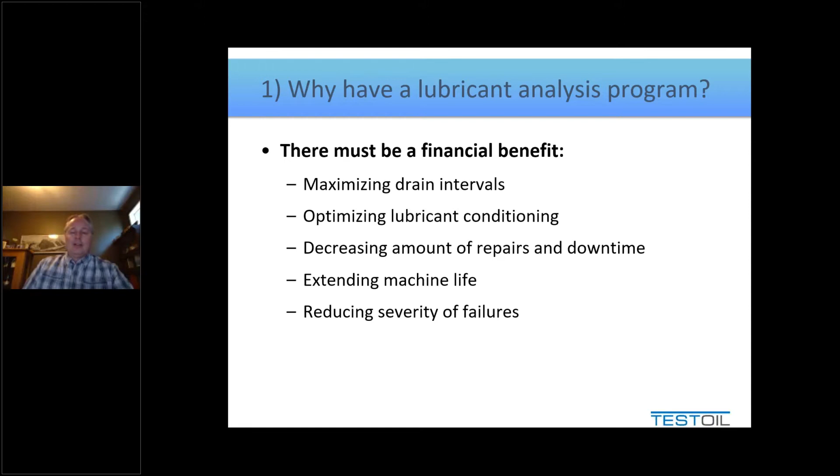So you're going to aim to reduce the severity of a failure. You may not prevent the failure, because if something's going to fail, it will probably fail anyway. But if you can catch it sooner and take corrective action earlier, the severity of that failure should be significantly reduced. The last one, though, is that, and you'll see where this is going...

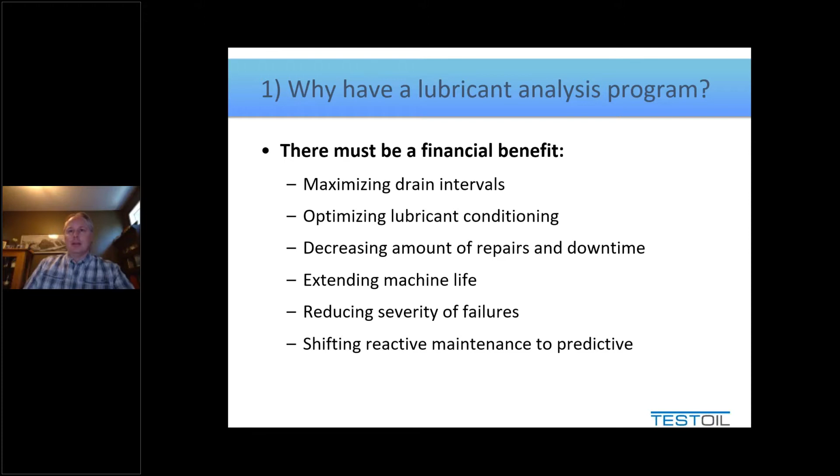Evan, you seem to be cutting in and out a little. I don't know if you want to try turning off your video too, so you're not using as much bandwidth for that. All right, let's try that then. All right, here we go. We'll see if that improves things.

But anyways, I was just finishing up with, we're trying to not use alarms as a reason to do things, right? We don't want to wait for the failure to occur or for it to at least enter into failure mode. We want to be as predictive as possible and do things on as much of a schedule with as much pre-planning as possible. It helps reduce costs, it helps reduce downtime, and of course, therefore increases uptime.

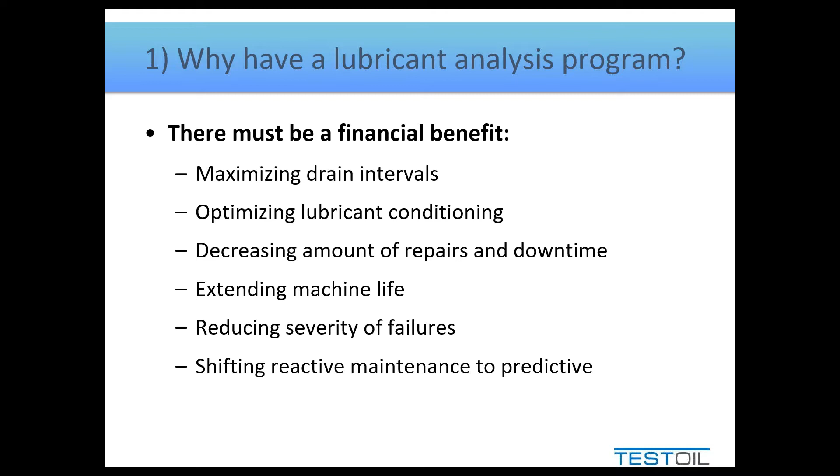So with that, you have to pick at least one of these reasons to have an oil analysis program. They help form the goal for the program. Now, when we talk about this, like I said, there has to be a benefit. So in picking one of these, we need, generally speaking, an economic return on investment, that we will have savings with all these costs.

And if you look at various examples that are out there, and I'll go through a few at the end, they range anywhere from 2.5 times return on investment to a 20 times return on investment. Point simply being, it should pay for itself.

And the idea why is that if you look at different statistics, they all hover around the majority, whether you want to believe 80% or 90%, but the majority of failures have something to do with the lubricant or its condition from degradation. Lubricant analysis picks up on contamination and degradation quite easily, so this helps us identify some of the more common problems that could lead to an equipment failure.

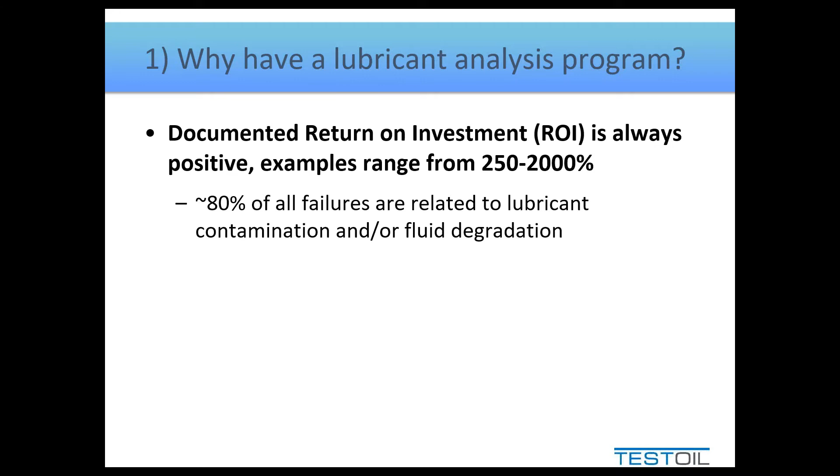Another reason to have a lubricant analysis program is it will support root cause analysis investigations, or if you prefer the acronym, failure modes and effects analysis. And it also works with synergy, meaning sort of a double positive effect here with the other condition monitoring technologies, especially like vibration.

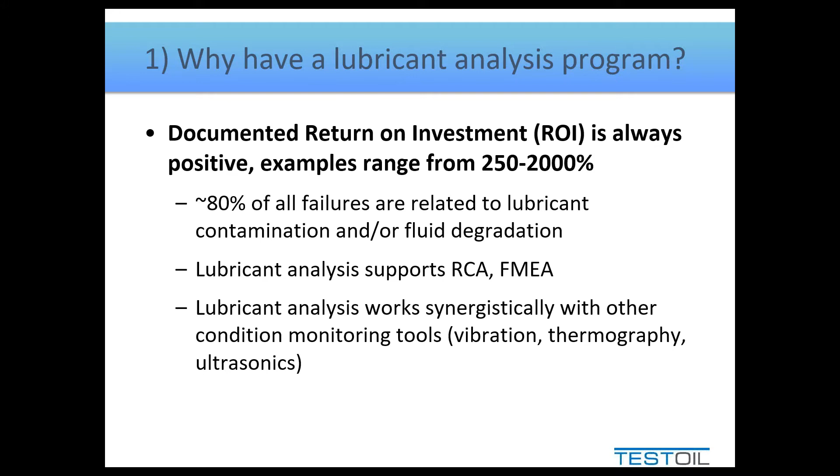As I said, we have to pick a goal, to have a reason for doing this, and we need to make sure it's going to be economically feasible. So the three most common that get chosen are that first one I mentioned: we want to reduce our oil consumption.

So that will help us understand what we're testing, which properties of the lubricant. A common one is extending equipment life, which in this case we'd focus more on, say, wear metals and contaminants. And of course, another good one is just to increase the overall reliability or uptime. And we might do a bit of a balance between those first two.

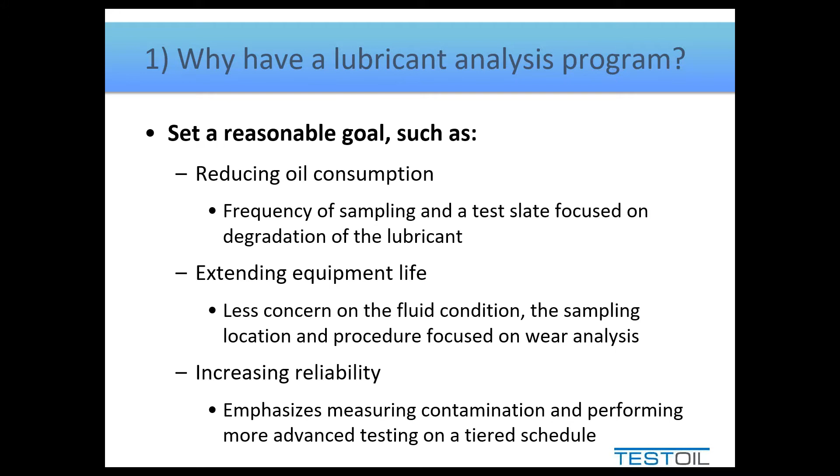So knowing why we have a program, knowing what the goal is going forward, we can now form our team of who's going to help us get there. So generally speaking, when you look at personnel required to be part of this team, you need to make sure they have the right skill set. I mean, that's true of any team.

So it starts with something as simple as pulling samples. If you can't get somebody who will pull samples in a consistent manner from a consistent location, you're going to get very noisy data coming in, and the program will already begin to fail before you've even really gotten started. So it seems like a pretty simple thing, but that's one of the skills you need.

And that may be fair if they've got the time, but if they're already dealing with a full slate and you have them running around doing these extra tasks, shortcuts will take place, or some tasks will get missed. So we want to make sure they have time to do that side of the job correctly.

The example I give here is the time to read the reports. It's an all too common aspect that many people can find the resources to pull samples, send them to the lab, pay for the results, but by the time the reports come back, nothing is being done. We don't have people reading the reports and writing up work orders based on them. They more or less glance at them quickly and say, yes, it looks like it will still run, we'll just leave it. They're not trying to predict anything, they're just looking for the absolute catastrophic bad examples to say, okay, maybe I should do something now. And at that point, it can be too late.

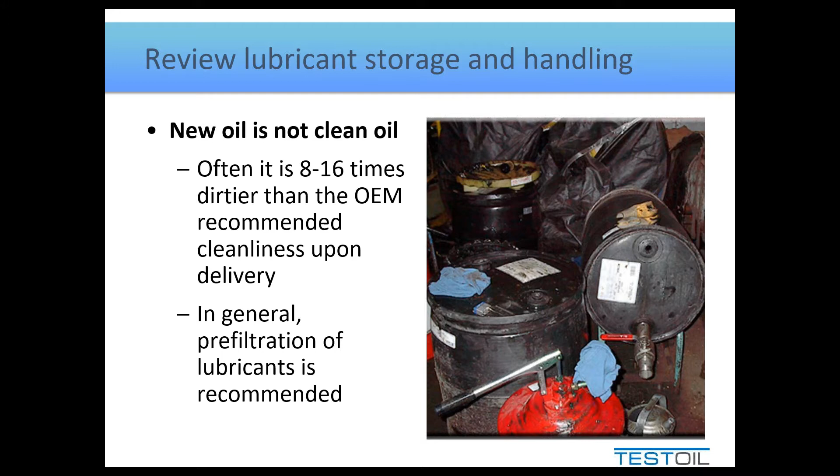So when you do an audit, and again, this is done all internally, you don't necessarily have to contract this out, you can do this yourself. You start by reviewing your storage and handling practices. Look for some of those easy changes you can make to improve the quality of your lubricants going into the machines, improve the accuracy of which lubricants go into which machine, things like this. So you start with receipt from delivery: where do you put your new oils, what kind of housekeeping do you have, what kind of filtration do you have. See if there's improvements that can be made there, and look for ways to prevent contamination.

Proper breathers is a very common thing that can be upgraded on both the new lubricant storage and even on the machines. Make sure you consider if you need desiccant though. That's not required by all people in all areas. It handles humidity, so unless you have a humidity issue, you don't necessarily need to go all the way to a desiccant breather. But if you do require it, make sure you size it appropriately so that it has the ability to strip enough moisture to make the difference.

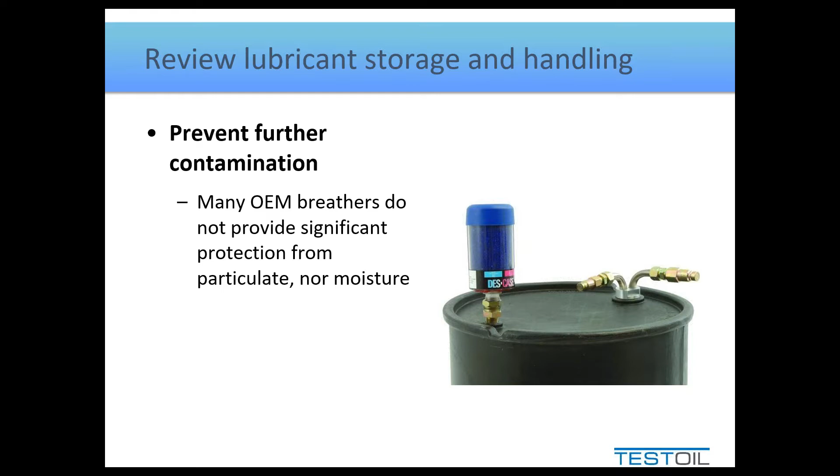But once you do that kind of audit on the lubricant side, then you go up to the machine side, and now you need to select which machines you want to sample. There's essentially 6 factors that I consider to make it worthwhile sampling. So one factor is...

Criticality. If the machinery is critical to your overall operations, it is worth sampling. Generally, when we say something is critical, it means that it doesn't have a redundant capability - there's not a second one that takes over if the first one fails. Or we mean that it has a cascading effect on other lubricated components, so if it shuts, other things shut, other things trip, that kind of thing.

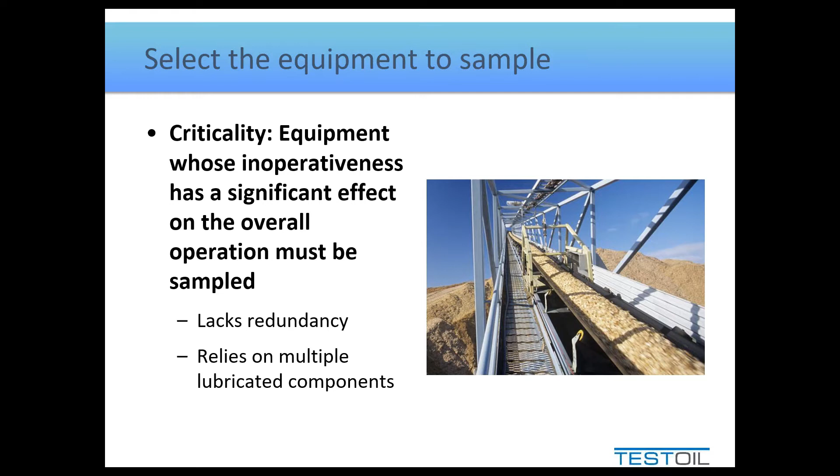Second aspect is if it's designed for safety. Is it required to provide some sort of safety function - a rollback device on a conveyor belt, a braking system on an elevator, and of course fire water systems that are quite common in many, many plant facilities. If it's a requirement for safety or any other regulatory concerns, it is worth sampling.

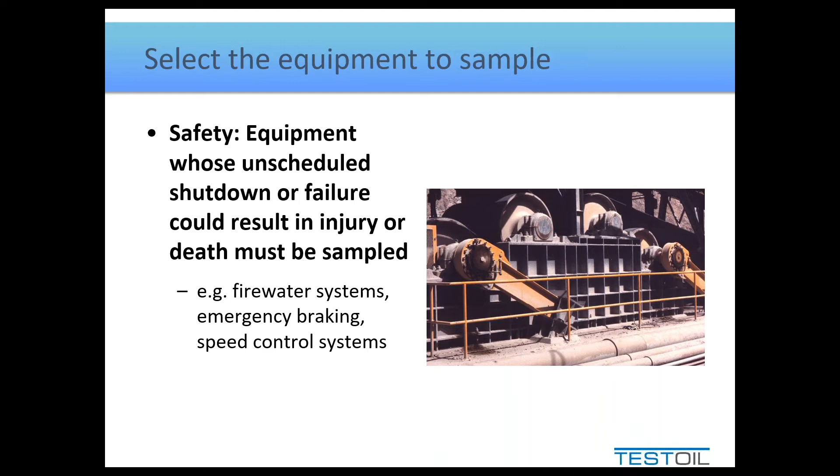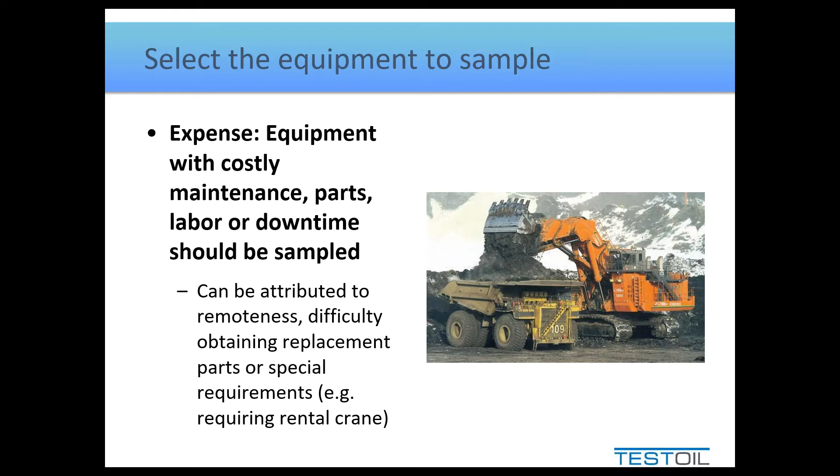Fourth one is reliability. If it does not have a predictable lifespan or failure, if things just happen and you don't seem to have logical explanations for them or any sort of predictable pattern to it, you probably should consider implementing lube oil analysis on it. But if you have machinery that's designed for a service life of 5 years and you easily get more than 5 years out of it, it's one of those things where we'd sort of look at it and say, why would you bother sampling it then? You're getting what you need out of it, so focus your efforts somewhere else.

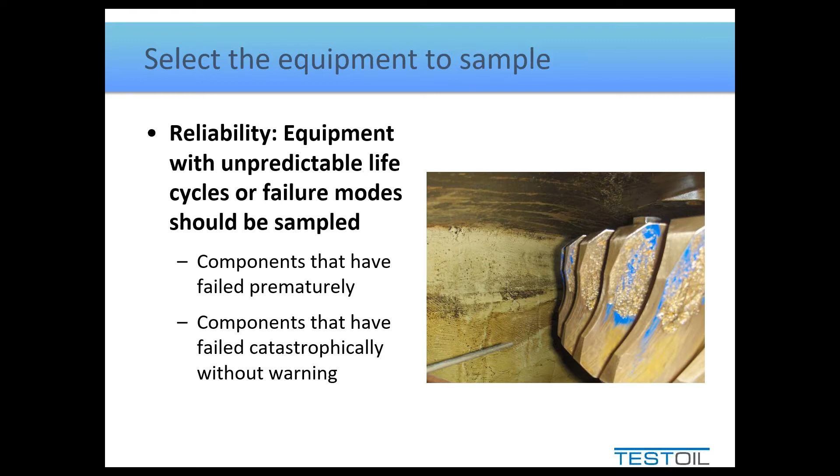The fifth is if it operates in an environment that you would suspect would contribute significant contaminants to the machinery. So it could be humidity, could be particulate, could be heat. Nearby heat even is considered detrimental to the operation of another piece of equipment.

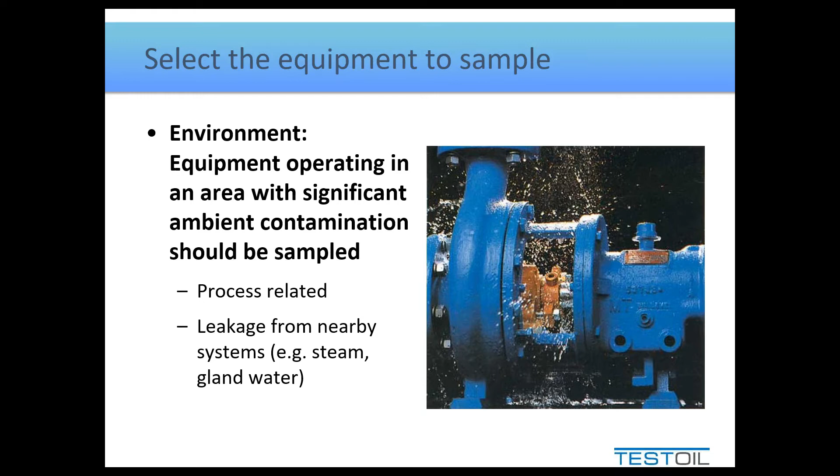And last but not least is looking at the expected efficiency. Does it seem to be consuming a bit more power? Is it not producing the widgets or operating at the speed you think it should? Anything like this that would suggest to you that it could be better would be a reason to sample it. So any of those 6 reasons is a reason to take samples from that piece of machinery.

But if you look around your facility and you go through this checklist of 6 things and cannot apply it at all to a particular piece of equipment, ask yourself, why are we even going to bother sampling it then? It maybe is not required. And again, we should probably focus our efforts on the ones that matter the most.

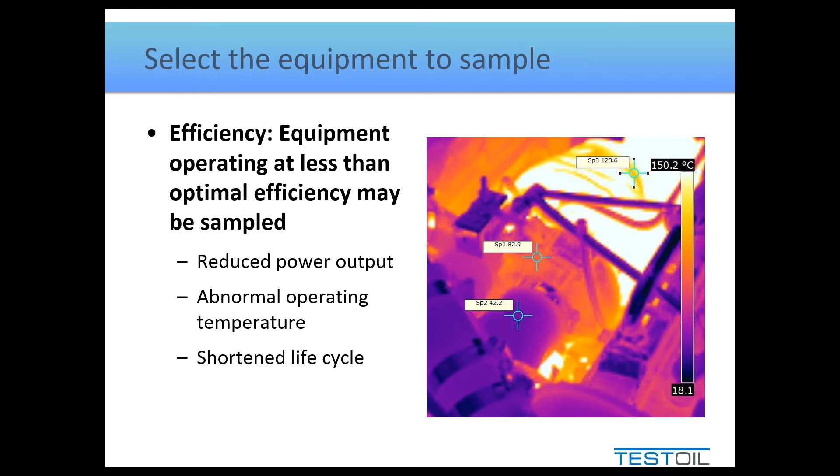Now, once we decide that it is worth sampling, we have to decide where to sample it. So we always want to make sure that the sample point gives us a good idea of what's going on inside. We typically look for live zones, not dead legs - we want good circulating hot oil that represents exactly what's going on in the machine. And when we pick it, we want to make sure that it's a choice that will allow us to take the sample consistently - same spot, same procedure every time - so we'll get trendable data.

If you're asking people to just shove a hose in through an opening and you have no idea where that hose is going to go, left, right, to the bottom, that adds noise to the data and can make it a bit more difficult to collect that kind of information.

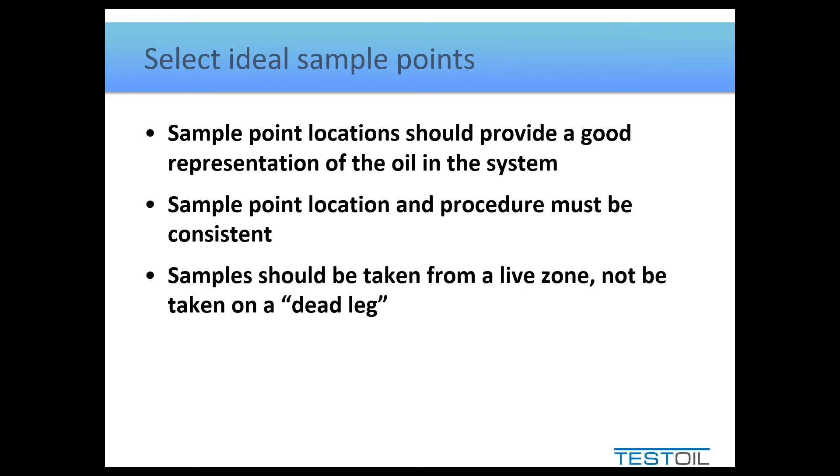Once we decide where we're going to sample, we have to decide what testing we want. That's partly driven by the machine type, since different machines have different wear modes or degradation properties, so you can choose testing to best reflect those. You also want to consider the fluid type, because different synthetics may have different properties you should pay particular attention to. Some oils are a lot more sensitive to water, as an example, so you might want to consistently monitor water content.

Operating conditions are another factor. If you know you've got a known contaminant getting in there, you should probably monitor that. And again, we circle all the way back to the beginning: what was the program goal? Were we trying to extend drain intervals? Then we'll focus on fluid properties. Were we trying to extend rebuild time or equipment life? We'll focus on wear modes. Are we looking at uptime and reliability? Then we might want to focus on both.

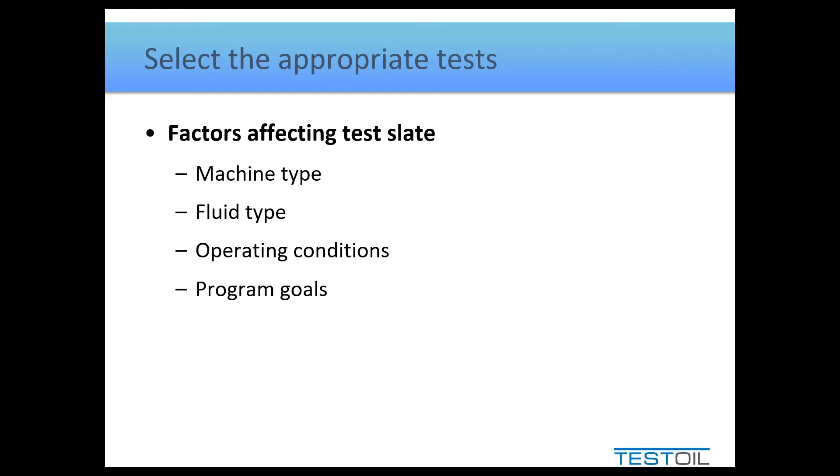Other things to consider are how often we should sample and do those particular tests. The frequency is most affected by some of those same factors. The criticality and the expense will tell us to sample a bit more frequently. If there's a reliability issue or a harsh environment or any operating conditions that are extreme, we'll probably want to sample it a bit more frequently. So lots of factors go into these decisions in terms of pulling a sample, deciding what test to get, and how often you're going to want that piece of data.

Even if you decide to sample something as frequently as monthly or quarterly, it doesn't necessarily mean you always want every single result at every single sample. There are some types of results you only need every second, third, or fourth sample.

But last but not least, as part of all this—pulling samples, picking tests, and deciding how often we want it done—ultimately you need to decide where you're even going to send these samples. Picking a lab is a big consideration as part of your oil analysis program as well, and that falls into a number of factors. The big things I always consider worthwhile investigating are how fast can the lab turn this around?

How good are the analysts doing the interpretation? It's one thing to get accurate numbers out of a lab; it's another thing to get a solid interpretation of those numbers. One factor we can use to verify that the lab should be accurate is any certification.

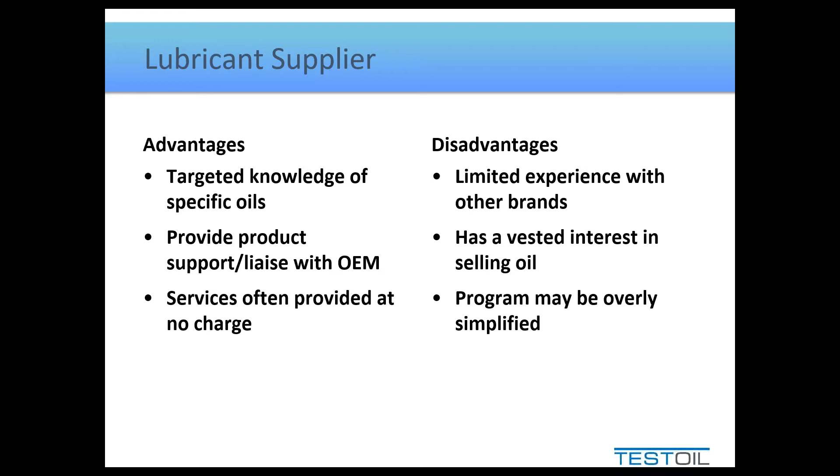So where a lot of people look to then is a third-party commercial lab. The advantages are they've got experience in all OEMs, all lubricant types. They have no vested interest in selling you parts or service. So when they give you an interpretation that says, we think this needs to be replaced, they're not going to make a buck off of it later.

Nice thing too is you can customize what they do. They allow choices to be made. You can supplement your testing, augment your testing, whatever you want. It's open because, well, you're now the customer, you're paying for it.

The disadvantages are that sometimes with these labs we can consider them to be jack of all trades, master of none. Some of them have very vague recommendations because they just don't have the expertise to be terribly specific. And of course, at this point, you're probably paying for it, so there's no way to get this one for free. Costs will run higher depending on the level of service you require. Now, the point of this presentation is to show you it should still pay for itself, but you need to be aware this is one of the more expensive ways of doing things.

The last choice is to do it in-house, do it yourself. The idea behind this is that you're only analyzing your own samples, so you tend to focus your expertise on your own equipment and you get quite good at this. Generally speaking, depending on who you're used to dealing with and how fast you normally get results, doing it in-house is typically faster. And the nice part of it is the end user then is in control of everything.

If they want an additional test, they can get an additional test. They want it tested a certain method, they can do it that way. I also list that as a disadvantage.

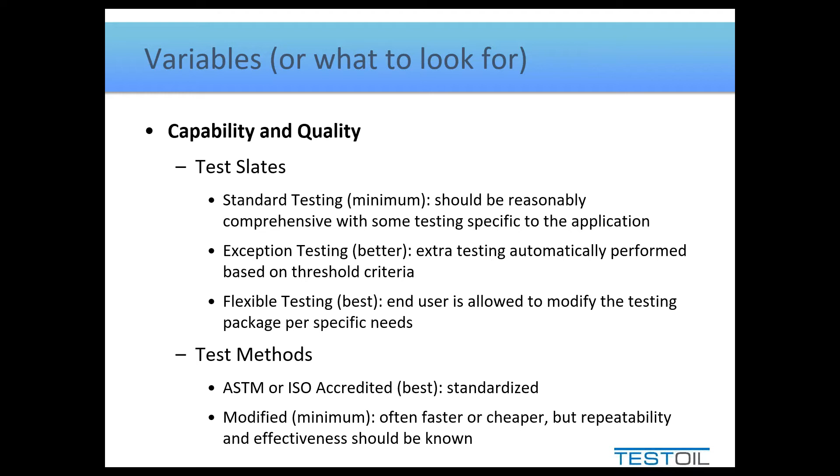Next, start looking into the logistics. The first one on that side of the equation is turnaround time. We know we can ship stuff overnight pretty much anywhere within the country, so there's no reason we can't get the samples to the lab quickly, but we now depend on the lab to get the results back to us quickly. Generally speaking, most labs should be able to turn around results in 24 to 48 hours, and that's from time of shipment to the lab to time of receipt of the results — not just time at the lab, but including shipping times.

We also want to know how do they alert us when there's a problem. Do they just PDF the reports and send you all of them so you have to sift through them? Do they highlight the ones with problems? Do they allow for web-based notifications? Even better, can you log into a website and see the worst ones sorted to the top, and all that kind of stuff?

Next is the quality of interpretation. Do they just use static limits, and if it gets an alarm or doesn't, do they statistically derive their limits to tailor them to your exact make, model, and maybe even oil combination?

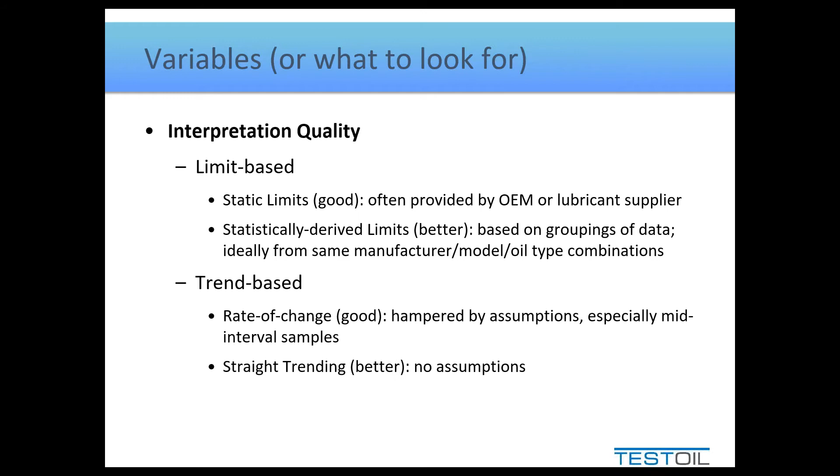Better yet, do they use trends? Deviations from trends can be far more valuable than just static limits. Or can they combine the two and show you the advantages of trending along with limits that are statistically derived? So there's different ways of doing this, and that generally is considered among the best.

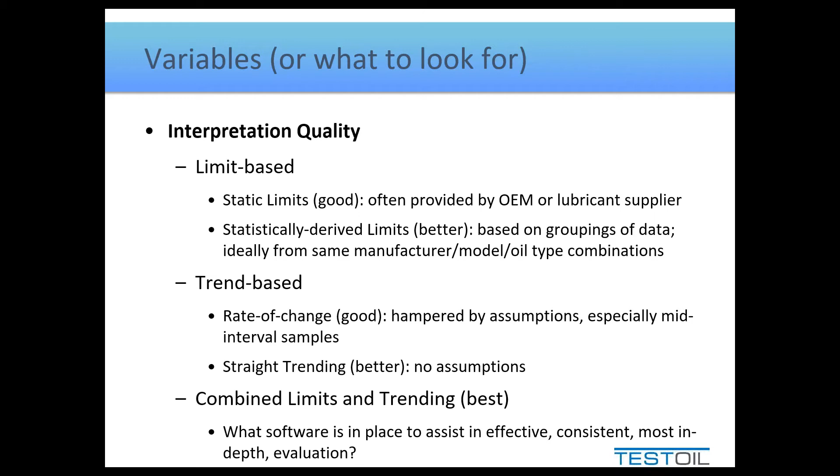Towards the end, once they've looked at your report and set off some alarms, how do they write up the interpretation? Do they give you very generic statements like 'iron is high, look for sources of iron'? That's not helpful. Do they tell you sources of iron may include a few items to look at? Or better yet, do they suggest that iron in conjunction with chromium suggests bearing wear compared to shaft wear, or something along those lines?

So there's lots of different ways they can write up their comments, and that's part of that deliverable, part of that report. You also want it to be very readable.

Is it just a bunch of numerical results you don't know how to interpret? Do they put some graphs in it to give you ideas of trends? Or do they even provide a grading system, showing limits maybe on those graphs, so you can see how close or far away you are from what's considered abnormal?

And kind of the last thing to look for: when you look at these reports, can you easily tell what machine it's for? That way you're focusing on what you know about this machine. Is it easy to find where the most current result is on that report? Is it to the left, is it at the top, is it highlighted in a different color? Do they provide baseline information so you have a comparison for that most current result?

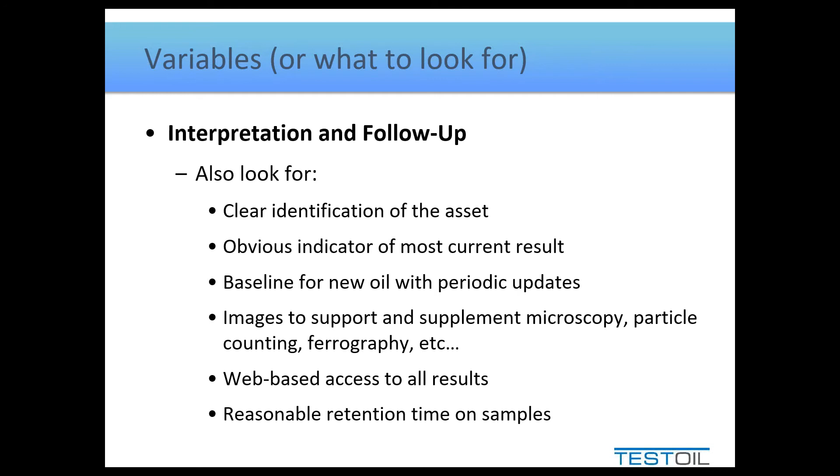So just in summary, when you're picking labs, you want to consider turnaround time, and that's not just how fast the lab does their end, or how fast you can get the sample to the lab, it's both. Consider the logistics of how everything's handled, and above all make sure quality assurance is high, so you've got accurate data to begin with. And finally, how do they send the reports out to you?

How is that data disseminated to whoever needs it? Can they share it with your OEMs, your lube suppliers, other people? Can they tell you what test methods they use?

Again, with modified methods, a lot of people use modified methods, which is not to say they're not good, but you want assurances that it's been verified against a published standard so you know it's good.

Flexible testing is very beneficial to the customer so they don't have to suffer paying for tests they don't have any interest in the results. Like, why would you get an acid number if you're going to change your oil every 6 months anyways? You're not likely to build up significant degradation products in that time frame, so perhaps you'd like the option of not paying for that test and focusing on something more pertinent to that particular asset.

Last but not least, can they present information to you in a reasonable, technically sound presentation, a report that you can read, you can interpret, and say, yes, I know how to move forward after having read this.

So once the report's in your hands, how are you evaluating that data? Are you leaving it with just what the lab personnel had to say and not moving forward on that? Are you sending these reports to outside consultants? Some people use different firms that offer to do this task for you, taking what the lab has produced and offering up their own interpretation, maybe writing up your work orders for you.

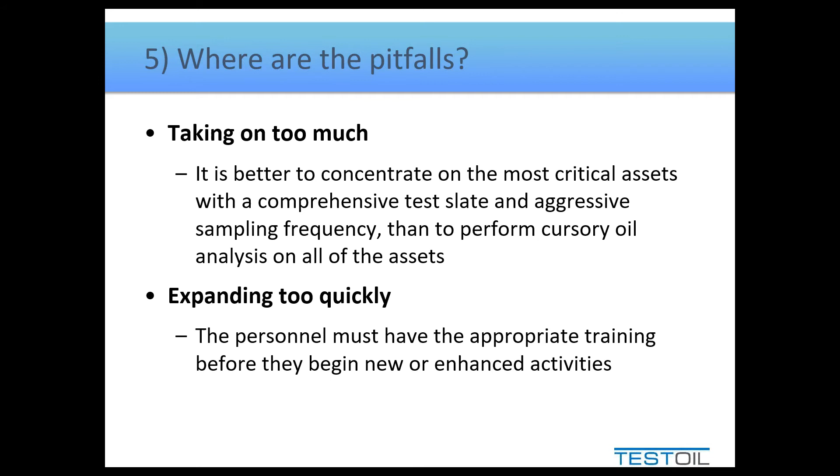If you have one report versus 100 reports, there could be different tests on those reports, different numbers coming back to you. Again, you need the training to know how to read these different values from the different tests. All kinds of things come into taking on too much or expanding too quickly. Baby steps—you want to start off slow and build momentum as you go.

Another big pitfall is related to communication. As anyone will always tell you, communication is king. A big part of an oil analysis program failing is about setting expectations. So it's important that everyone's sharing that common goal. You need to make sure it's well communicated. If you said we're going to save on oil costs, everybody needs to know that, so they understand why you're doing it and what your hopeful outcome is.

You don't want somebody saying, well, that machine failed anyway, even though you had an oil program. You're like, I wasn't trying to prevent its failure. I can't prevent its failure, maybe, as you're thinking. All I can do is try to use as little oil as possible throughout the life of that machine. I can at least save that kind of money. And if people realize, oh, that was your goal—how much oil did we use this year compared to last year? You can show them it was a savings, so the program's still successful.

But if people have these sort of unwritten or non-shared expectations of the program, they may not feel like your program's working, and they may work either against you or just not work with you—not rowing in the same direction. That's why I always emphasize culture change. People need to see the benefit, and they will only see the benefit if the program is working towards a set goal and people know what that goal is. Otherwise, they will assume goals which may not be achieved by the program, and therefore it may look like the program is failing.

But the last side of it comes down to the how. We need to understand that this communication goes from the top to the bottom and from the bottom to the top—everyone's involved. We know what the goal is, and we know if we're working towards the goal. We need to know, now step 6, how are we measuring that goal? If we set out to do something, we need a way of measuring it. As the common statement goes: if you don't measure it, you can't improve it. So if you can't improve it, why are we doing it? The most common method for measuring things is what we call KPIs, key performance indicators.

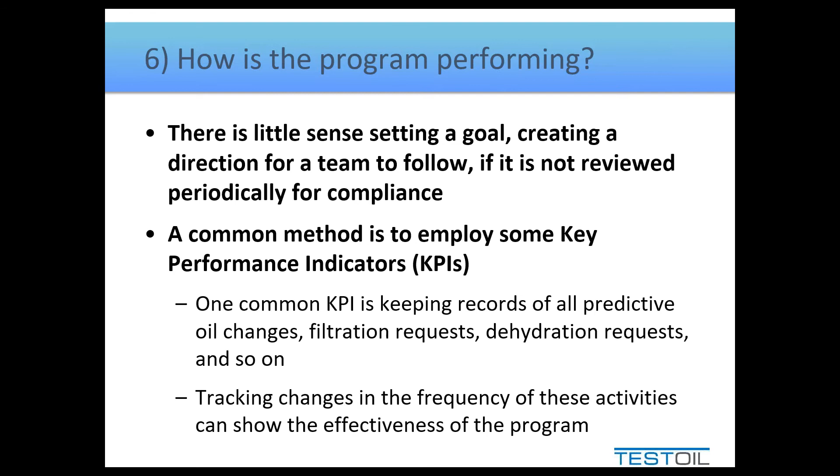Hi, Evan, can you hear me? It seems like we might have lost you. Let's see here. There we go, hi Evan. Oh, it's showing my audio still. Evan, your audio is still cutting out a little bit. Hey, can you hear me well now? Yes. All right, because yeah, it showed the connection was completely lost there for a second.

Anyway, why we continuously do these evaluations is to show we're still working in the right direction. The easy answers, like I said, are counting, just counting work orders, oil changes, oil volumes, uptime hours. Those are some relatively easy KPIs. I'd like to show you an example of a deeper one.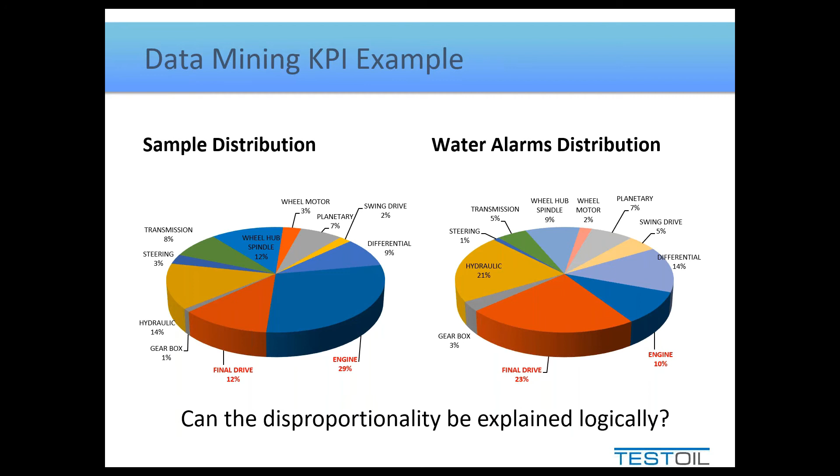So that's what they get into in terms of data mining, sort of looking for these opportunities to help reduce some of the effort and work towards the goals that we set. We could start changing the fluid more frequently in the final drives to help prevent the buildup of water.

But if our goal was to reduce oil consumption, that's going to work against that. So we need to find alternate solutions.

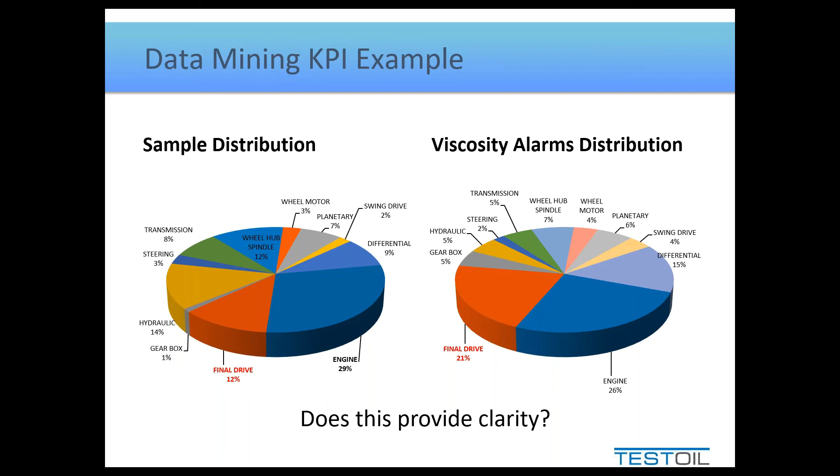But just to give you other ways that programs have been evaluated, I'll show you a pulp mill. This pulp mill had 65 process pumps. They analyzed their own samples with an in-house laboratory, using a particle counter with a limit of 18/15 as a particle count, and they did a crackle test to confirm the presence of water. Again, they don't want any presence.

When they started off on their program, they found that about 70% of their samples failed at least one of these two tests. So what they decided to do was implement more frequent oil changes, and they set the target one ISO code lower.

The outcome was a reduction in the number of samples that failed either particle count or crackle. So they decided to start doing them even more frequently, but keep the target the same. What they experienced was an increase now in the number of faults.

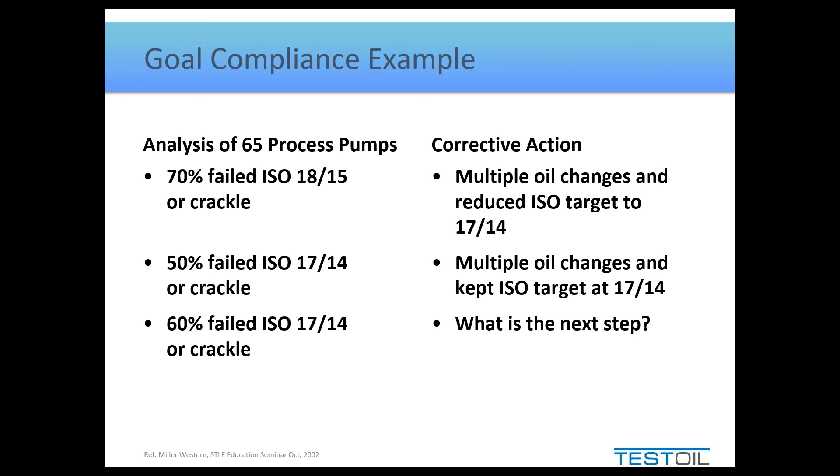So if you can see this, obviously they needed to try something different. And the next step, well, it wasn't going to be more oil changes. That was not the answer. So what they looked at then was filtration. Could they filter the oils instead of changing the oils while they were in the machine?

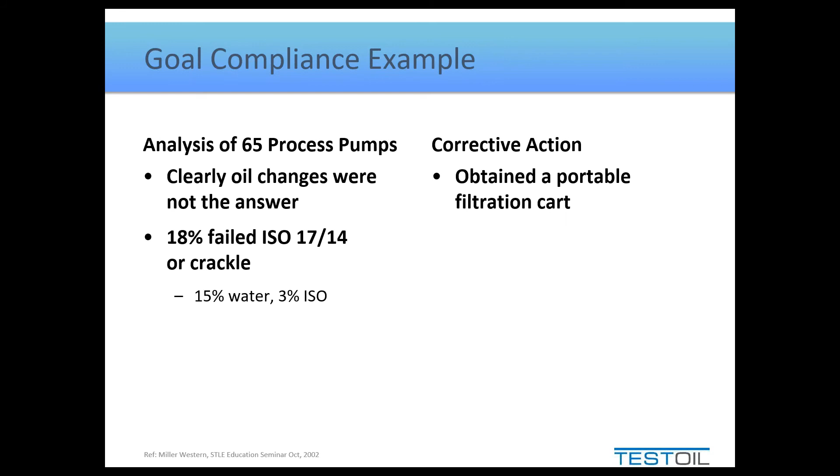When they tried this, they found only 18% of their samples failed. But when they looked closely at that 18%, they found most of them were failing because of water, not particle count. So what they did is modify their auto oilers to have a tube connecting the oiler to the breather of the bearing housings on these pumps.

Therefore, it wasn't exchanging air with the outside environment as the oiler replenished the oil supply. What they then found is only 2% of their samples failed a crackle test, and they were able to set their ISO code limit one code lower yet. And remember, that was in comparison to 70% failing two codes higher.

So by implementing filter carts and modifying their oilers, they took the number of alarms from 70% of the samples pulled having an alarm down to 2%. So there's proof in the pudding that they could reduce the number of alarms, which meant the lubricant quality had been improved, which should therefore have a positive effect on the machine as well. So a couple quick examples just to show you.

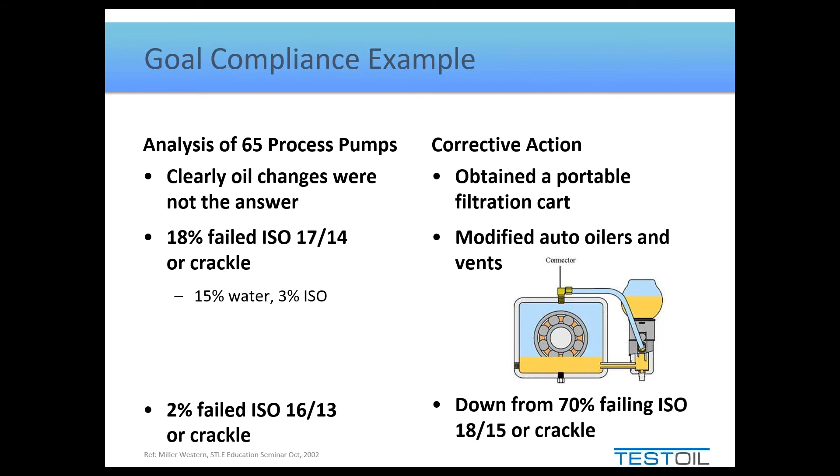As I said before, we often track the success of the program based on goals, but another way we do it is based on return on investment. Did we save money? So it comes down to money. Be liberal with the cost, be conservative with the savings, and one of the biggest factors I point out is don't double dip.

What I mean by this is sometimes people catch a problem and they say, wow, we caught this problem. Had we not caught this problem, that machine would have failed. That's a $50,000 machine. Well, that's fair. But then later in the same year, they catch another fault and they say, oh, we caught another fault, and had it progressed, it would have failed.

So they rack up another $50,000 savings. Point is, think of it this way. Had the first fault actually caused a failure, you would have replaced the machine for $50,000. You would have had a brand new machine. It probably wouldn't have failed that time, right? But because you're jollying along an older machine, it may have multiple faults, multiple trips, and you can't write off the entire cost of the machine every time you find one. That's what I mean by double dipping.

Some people are just trying to boost their numbers too much, and it doesn't work in your favor. It makes the program look unbelievably profitable, which cannot be maintained over a long period of time. So be conservative. If you save a machine once, you can attribute the entire cost of the machine if you feel that's necessary. But if you save it a second time, you're going to have to take a percentage of that, because you would have replaced it the first time.

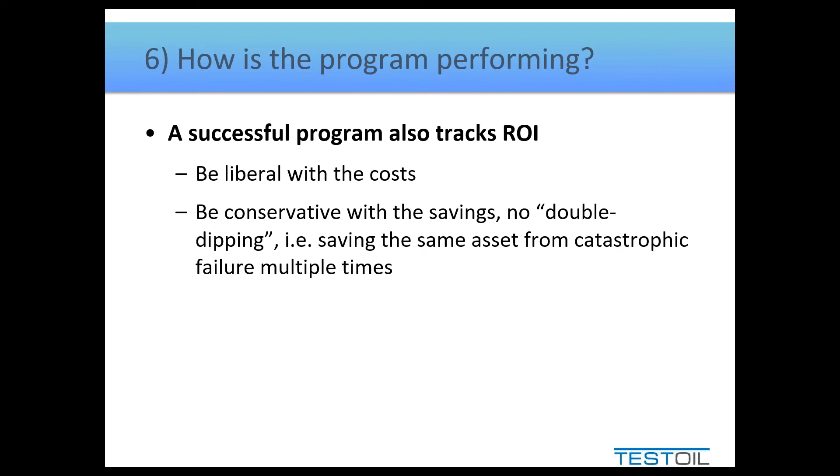Be very liberal with your costs. When you start saying something like, we're going to reduce the amount of money we spend on oil changes, a lot of people look at that and say, well, that math is easy. How much did the oil cost? How much did the labor cost to change the oil?

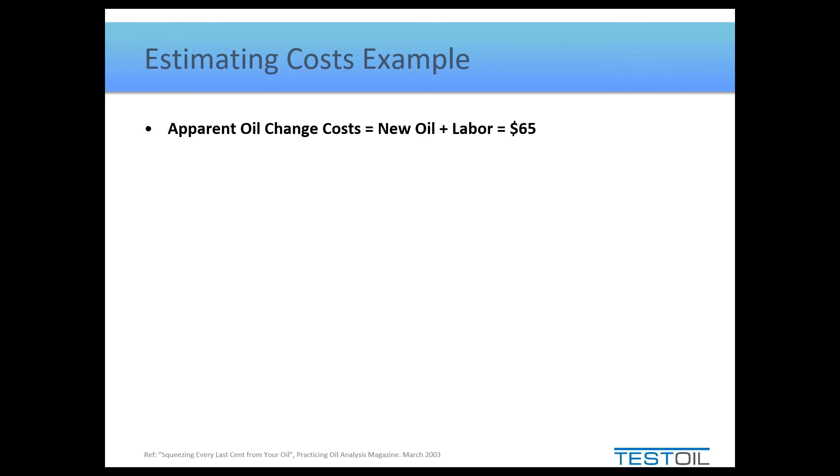When they said oil costs money to dispose of, they only put it at 50 cents a gallon — not expensive. For other things, they just said let's take 1.5 times this hourly rate, or 2 times that. Very conservative, in my estimation.

They point out that if you want to buy a pail of oil, in most organizations that means you have to go through purchasing. Purchasing then has to contact a supplier, and the supplier has to be issued a PO. That step alone, statistically, costs anywhere from $50 to $100 just to get your organization to cut a PO.

When the distributor sends you that pail of oil, they also send you a bill at some point. The bill gets received and put through accounts payable, a check has to be cut to pay for it, mailed out and processed. Again, it can cost you $50 just to pay for something.

So you start adding these things up, and it's no wonder that something as simple as an oil change can cost upwards of close to $1,000 in this example, once you factor in everybody who handled that oil coming in, going out, the purchase of it, the disposal of it, and all the labor at every single step along the way. So be liberal with your costs — it will still come out in your favor.

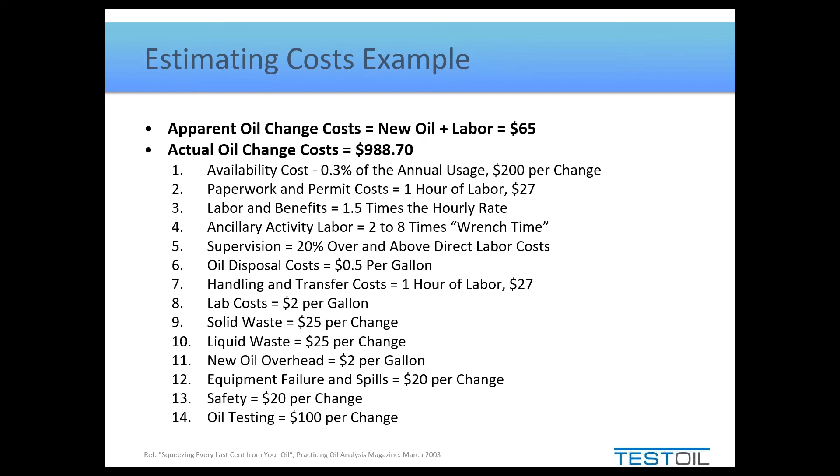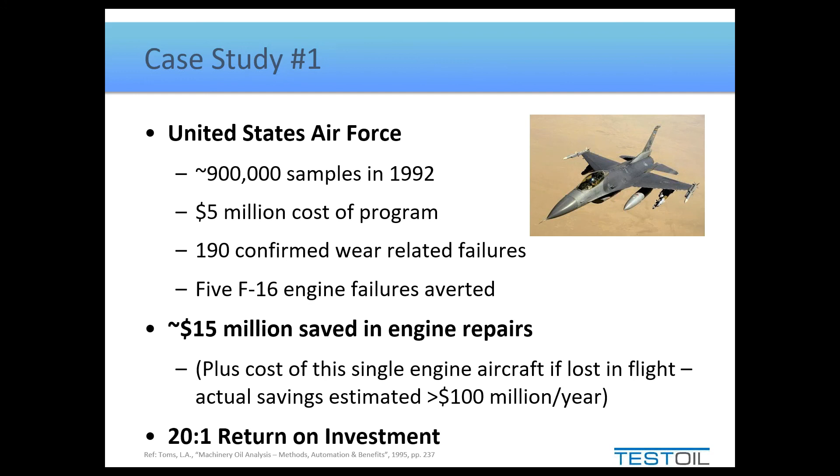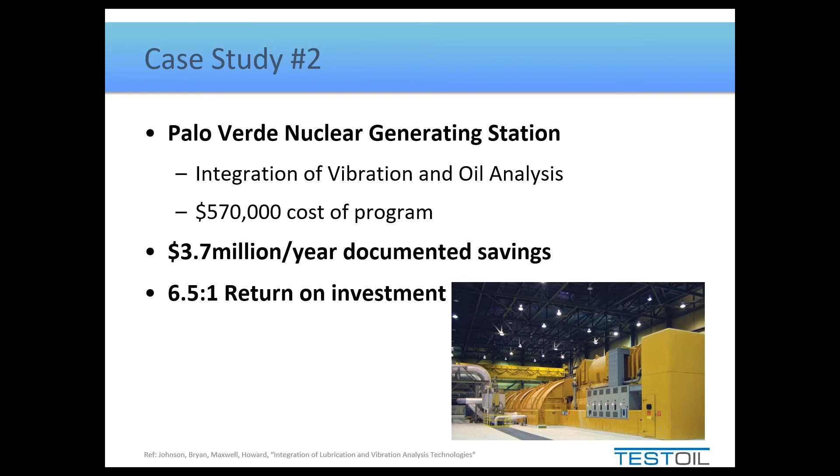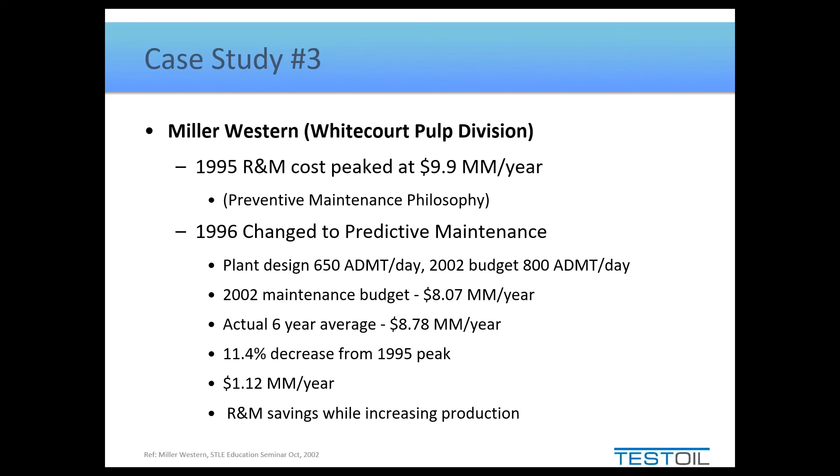Going back to the Miller Western case study, the pulp mill, you got some numbers here. Basically they were spending $10 million a year on repairs and maintenance. They were producing 650 air dried metric tons per day. Six years later, they'd increased their output to 800 tons per day, and they'd reduced their repairs and maintenance budget by about $1 million a year.

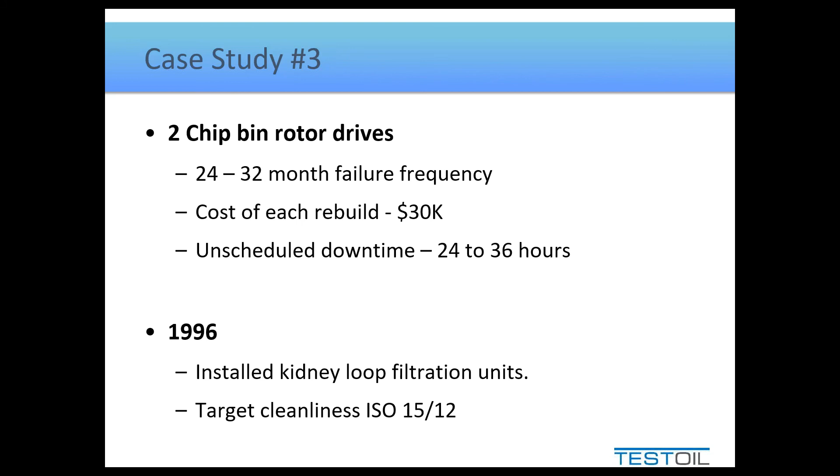So the last thing I want to leave you with is, how can you come up with your own numbers? It's easy when you have something very tangible that you can document that says, here's a thing, here's a cost, here's a savings, do the math. But what if you're just trying to estimate it? What if you're just trying to come up with reasonable numbers?

So the last example I'll walk you through is from this excellent magazine article. It says, look, classify your failures into 3 categories: severe, moderate, and minor. Come up with a cost for the downtime, for the parts, for the labor, so you can come up with a total, raw total cost.

Now, from there, doing what you're doing right now with no oil analysis program already going, estimate some probabilities. What's the chance a failure is going to fall into which category? Then you end up with a weighted cost.

Now, make a very conservative estimate. With your oil analysis, imagine shifting some of the severe failures to being just moderate failures, and some of the moderate failures to being just minor failures. So all you're going to do now is change those percentages a little bit, shifting some of them from one category to the next to the next.